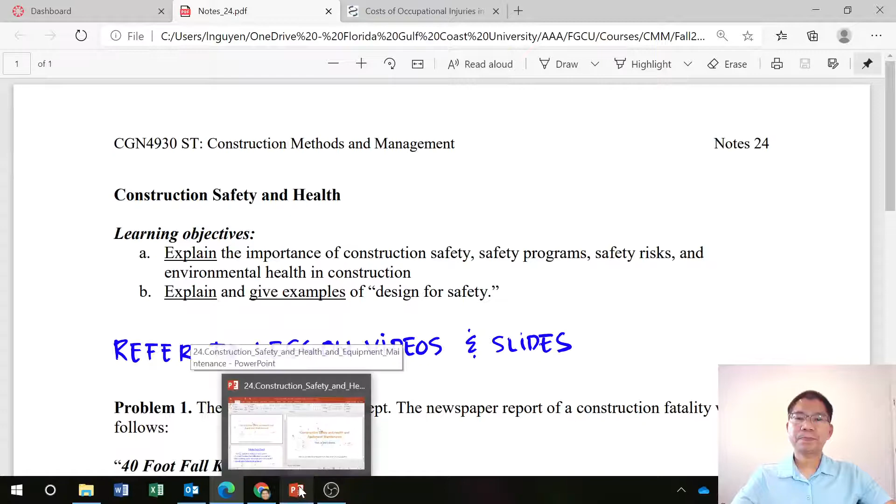And many of you will become engineers. Believe it or not, whatever you design may play a key role in the safety of the workers when they execute and perform the work to make sure that your design becomes a reality. So let's talk about some concepts of construction safety and health and equipment maintenance in this lesson.

So before we get into the design for safety, we want to go over some statistics about construction safety, to see how important construction safety is. Do you know what percentage of the U.S. workforce works in construction? Can you guess what percentage that is? Or what percentage of work fatalities construction accounts for? Whether construction is safer than other types of industry, like manufacturing, mining, etc.

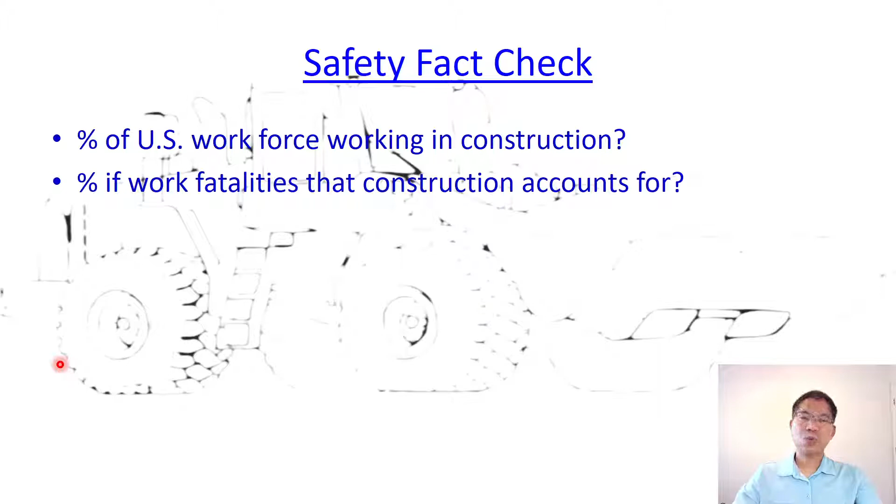And then, see if you can answer those questions, otherwise you can Google it. What percent of disabling injuries does construction account for? What are the annual costs of construction accidents? So with that, I want to show you all of that information in the report here.

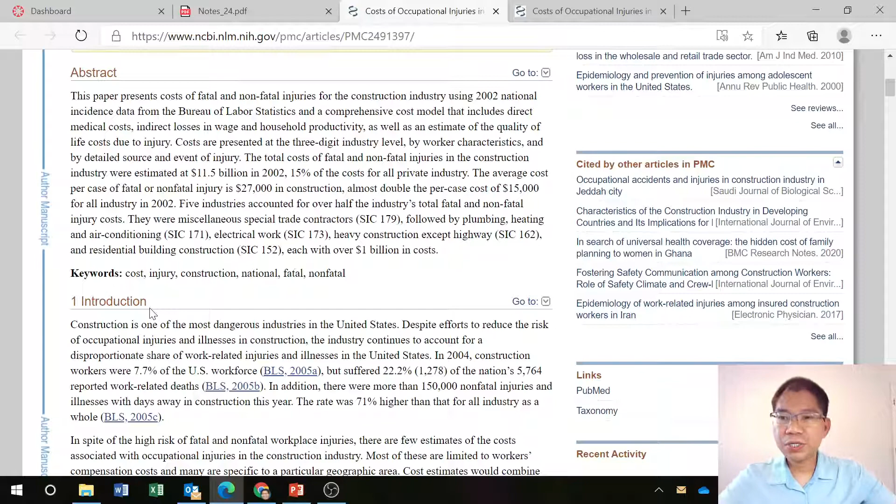So first, to answer those questions, you have occupational injuries in construction in the United States. So to answer the questions: the percent of the workforce working in construction, and the percent of worker fatalities that construction accounts for. Let's go back there. And you can see here in the introduction, the link is available in your slide.

Only 7.7% of the US workforce works in construction. But the suffering is disproportional, and you can see that 22.2% of the fatalities happen in construction. So the workforce is 7.7%, but fatalities account for 3 times that for the overall construction workforce. And the rate was 71% higher than all industry as a whole in terms of injuries. So that answered your question there.

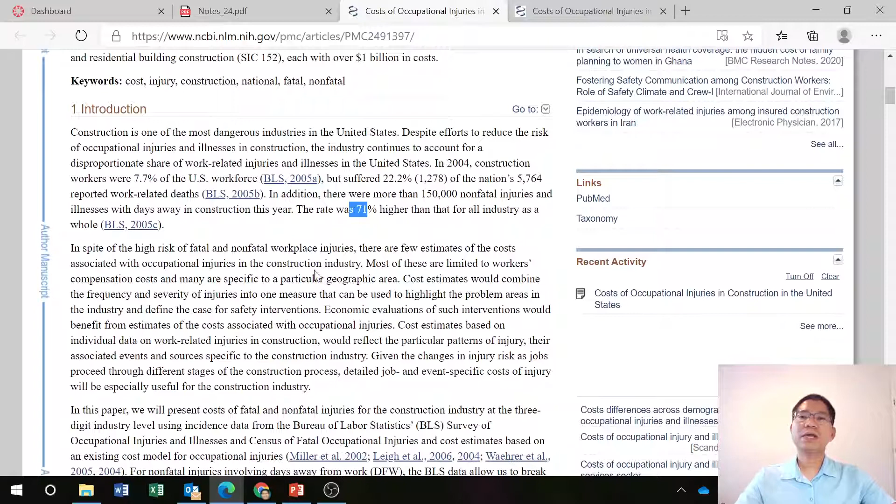And it also affects construction costs. If you read further in the link that you have here, you can determine it's very expensive, including direct costs and indirect costs involved when an accident happens. So go ahead and see the link that I have here so that you can know more about the statistics of safety and its importance. We have to emphasize always safety first in any workplace.

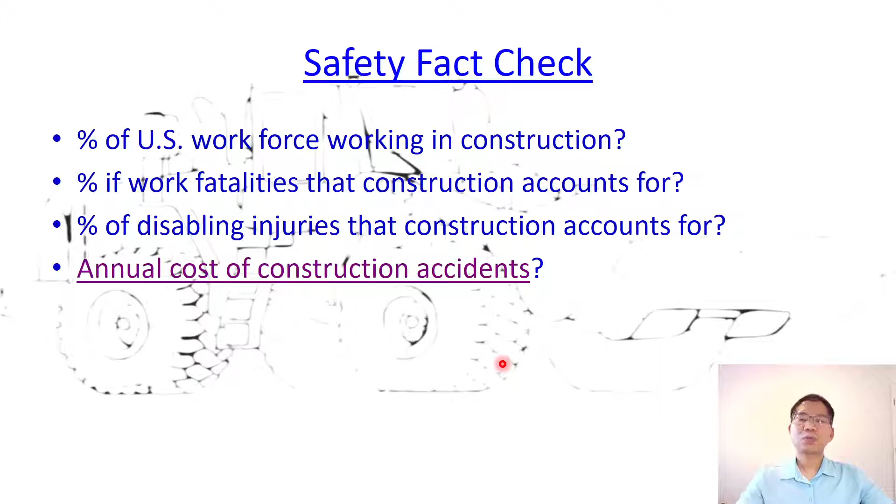And today I give you some scenarios, some examples where you can see your design may play a good, positive role in construction safety. So before we get into the design for safety, we want to see what the safety risks in construction are. So when you know that, when you design, you should be able to look at all of this.

The typical risks in construction include being struck by equipment, caught between two objects, things like that. Struck against objects, caught in or compressed, fall to a lower level, like a roofing worker falling, or the trench, the excavation, falling into the excavation pit, that is a fall to a lower level. Falls on the same level, if you get stuck, fall, things like that.

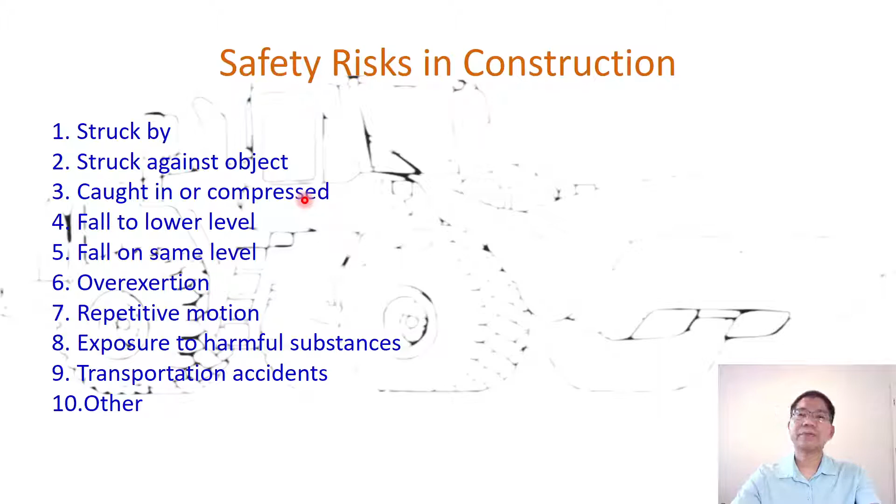Overexertion, repetitive motion that may cause fatigue, and that has a safety risk. Exposure to harmful substances, chemicals, things like that. Transportation accidents and others. So those are the risks involved. Electricity cuts, shocks, all of that. So with that, we recognize safety.

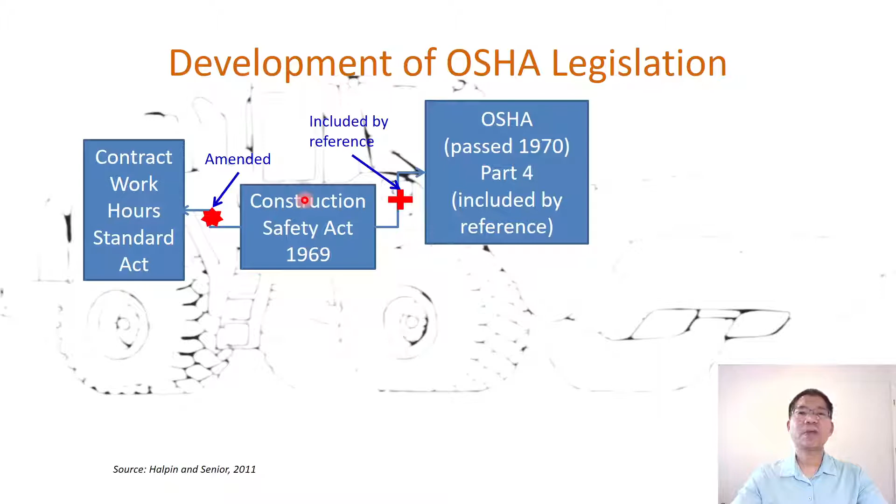So we have the OSHA legislation involved, OSHA meaning Occupational Safety and Health. You had a chance to learn about that when we did the excavation for foundations. It started as the Contract Work Hours Standards Act, and then it was amended to become the Construction Safety Act in 1969, and then included by reference in OSHA, Occupational Safety and Health, which was passed in 1970, Part 4, included by reference, and also published by the Secretary of Labor in the Federal Register in 1971.

We have Part 1926 construction standards. We had a chance to introduce that in the previous lesson. And then Part 1910 is the general standard. So most of construction safety is in the Federal Register Part 1926 construction standard, including what we learned in foundation construction, that is sloping, benching when you do the excavation, shoring, etc.

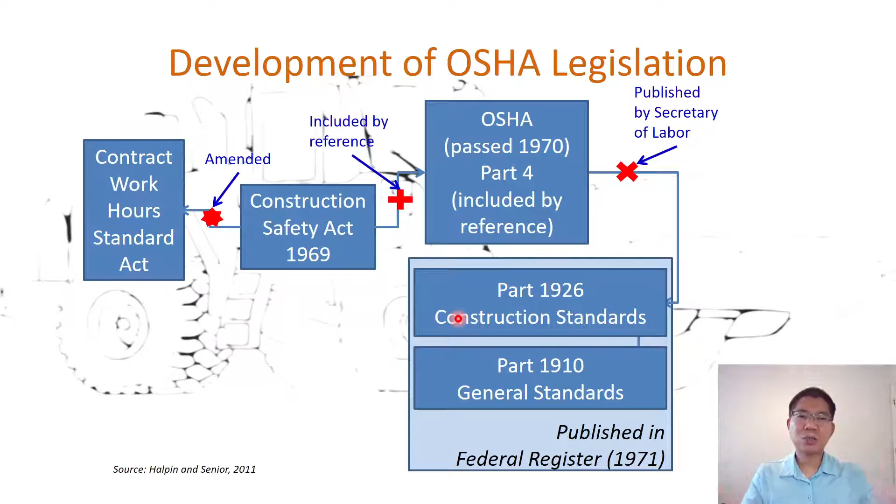So what happens if a company gets some violation of the OSHA regulation? And you can see the violation, it depends on what type of violations. Then there is an administrative proceeding or criminal. If it's willful or repeated, the same violation, $70,000 per violation. Routine or serious, $7,000 per violation.

Failing to correct a cited violation, it already violated but failed to correct, $7,000. Failing to post citations near the place where the violation exists, so that we know and try to avoid it, also $7,000 per violation. For criminal, you also see that in here, if it's killing, the maximum can be imprisonment, can be a life sentence, and a maximum fine.

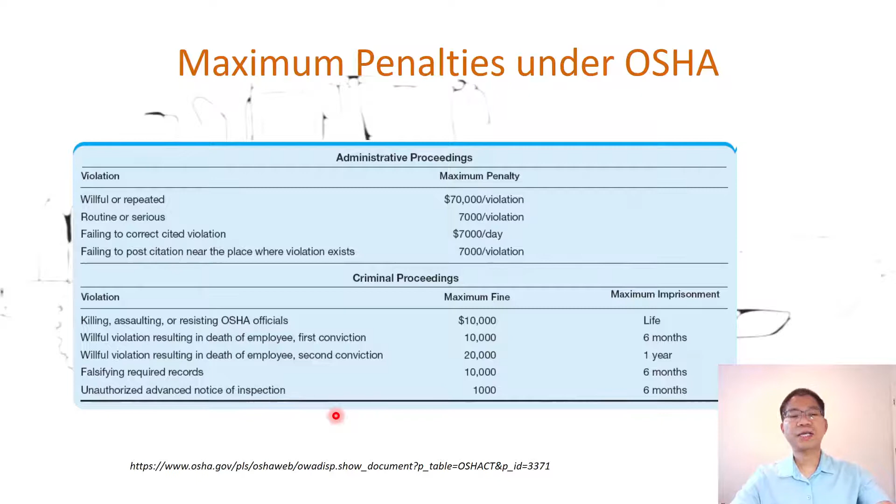So you see that it's serious when there is a violation or accident on the construction site. With that, multiple safety programs are implemented at the contractor organization: a formal safety program for all new employees, orientation on safety, periodic refresher training for each worker. Even at FGCU, every year faculty and staff have a safety refresher at the beginning of the academic year to review the safety protocols, things like that. In the workplace, in the laboratory, if you work for the laboratory, you have that as well.

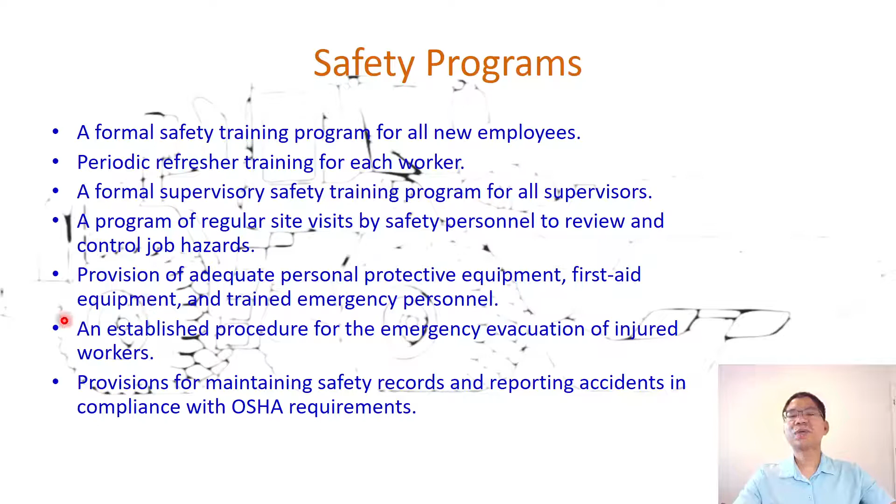A program that has regular site visits by safety personnel to review and control the job hazards. A formal supervisory safety training program for all supervisors. So all of these are the safety programs available that you can go ahead and explore. And then we have safety procedures for the program: general, equipment operation, who can operate, at what time, in what conditions.

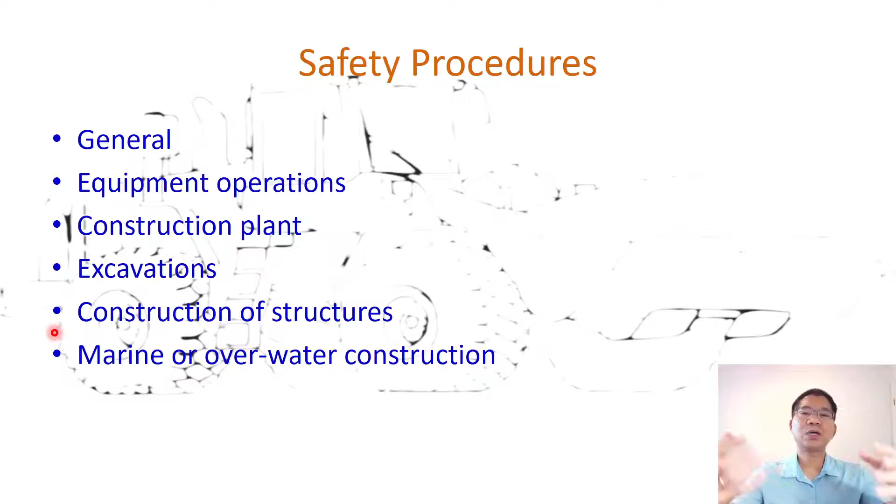So construction plant, excavation, something we already talked about in the very first lesson of the second part of our class. Construction of structures, marine, and overwater construction. So for all of that we need to have a specific procedure for your type of work.

I'll give you one actual example from the progress report of a project in terms of the safety update. You see this month they had 3 OSHA recordable incidents during this period, and you can see different subcontractors in this company have employees involved in some kind of incident, like a Titan employee fractured his left toe when his co-worker lost grip on the rebar they were moving, and it struck the worker on the left toe. So you see that it happens to anyone, and even for this power plant, in 1 month they have three OSHA recordable incidents.

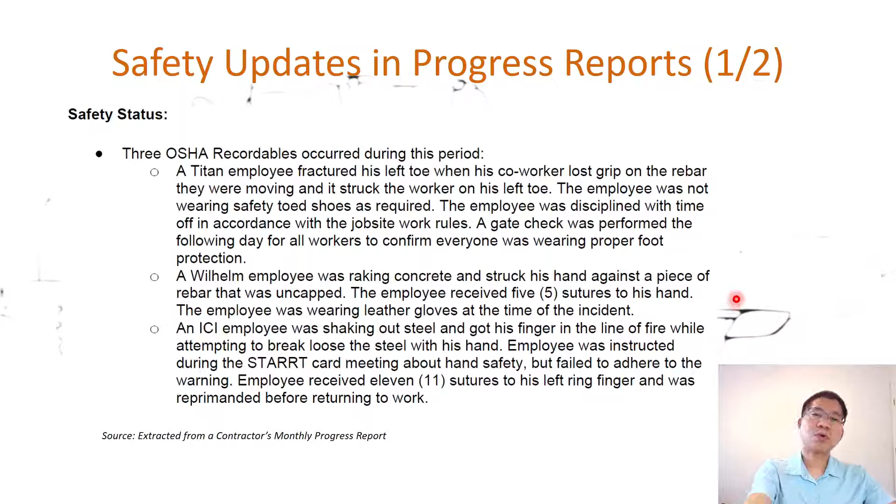And you also have the safety update in the progress report to see the lost time injuries, things like that in here. Also recordable injuries, year to date rate, inception to date from the beginning, 11. Inception to date means from the start of the project, because the project can take more than a year, so you have year to date, calendar days, and then inception, which means from the project beginning, which may be last year. Lost time accident, days since the last lost time accident. So if it increases, it's good, it means no lost time.

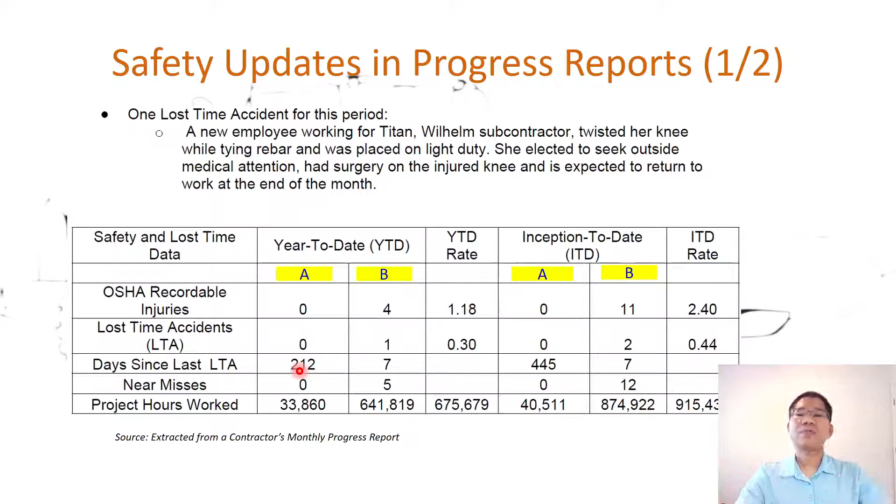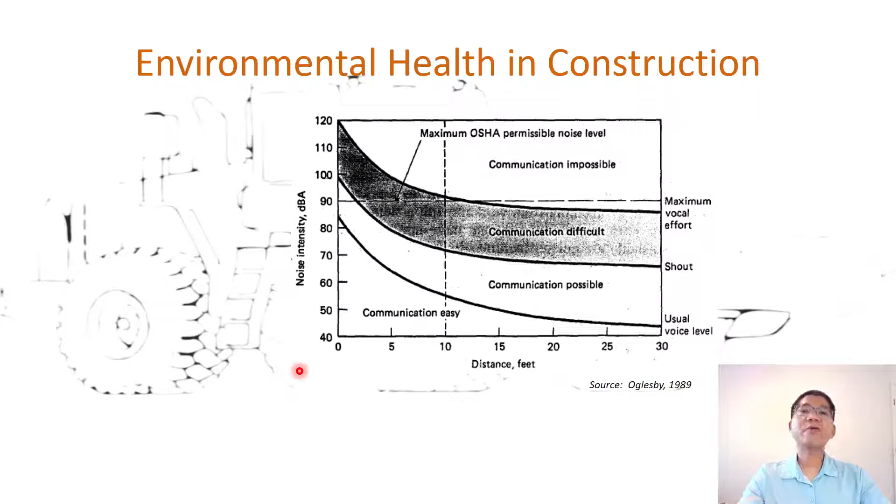And the second point, not only construction safety, the environmental health in construction is also important. As you can see, the noise, the dust, radiation, may not cause damage immediately, but it may affect the worker's health over time.

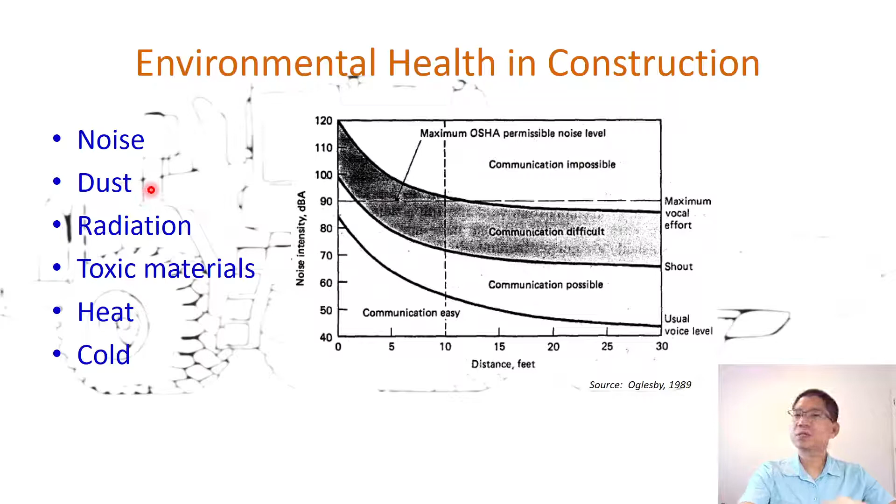Radiation, toxic materials, heat, cold, and in this case I show you one example in noise: the noise level in terms of decibels, and how far the worker is from the source of the noise. And you see the zones where communication is easy, communication is possible, it's difficult, and at some point when it's close to the noise, or the noise is too loud, communication is impossible, and over time it affects the worker's brain, things like that. Same for the dust, which affects the lungs, radiation, toxic material, heat and cold.

So by now you see the importance of construction safety. What do you as the engineer, when you design the work, play as a role in ensuring safety? So the concept of design for safety is involved in here.

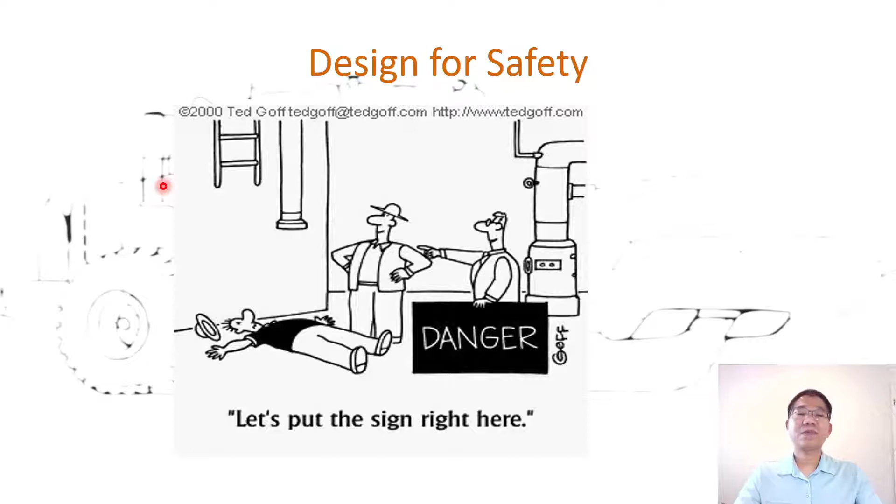So let's put the sign right here, so that after the fact, the danger, someone falls down, gets an accident - that's too late. That's reactive. You need to be proactive. Designers play a key role in making sure they are proactive and involved in safety at the construction site.

So example number one, and you can relate that in many items, so that when you design in the future, you can be able to improve the safety for construction workers.

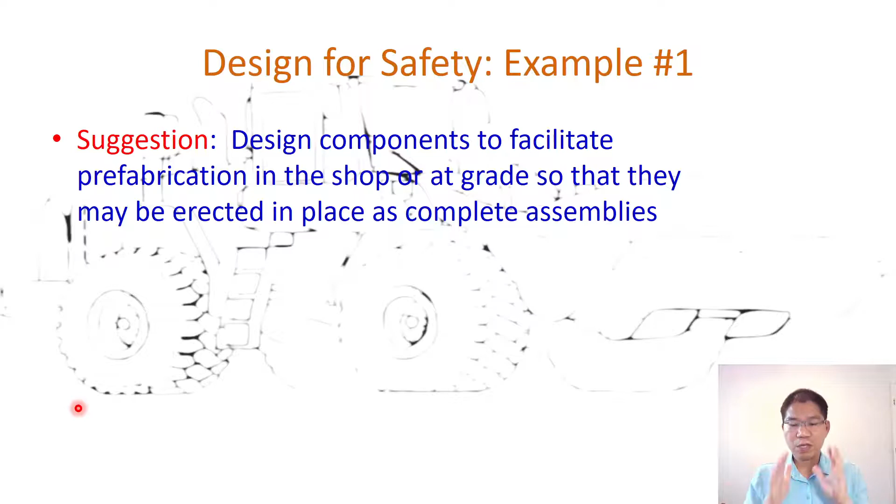Design components to facilitate prefabrication in the shop or at grade, so that they may be erected in place as complete assemblies. Because work in indoor areas, like a fabrication shop, is safer than working on site with too many uncontrolled variables. So if possible, when you design something, try to have it prefabricated rather than everything being done on site, so that you reduce worker exposure to falls or to being struck by falling objects on the construction site.

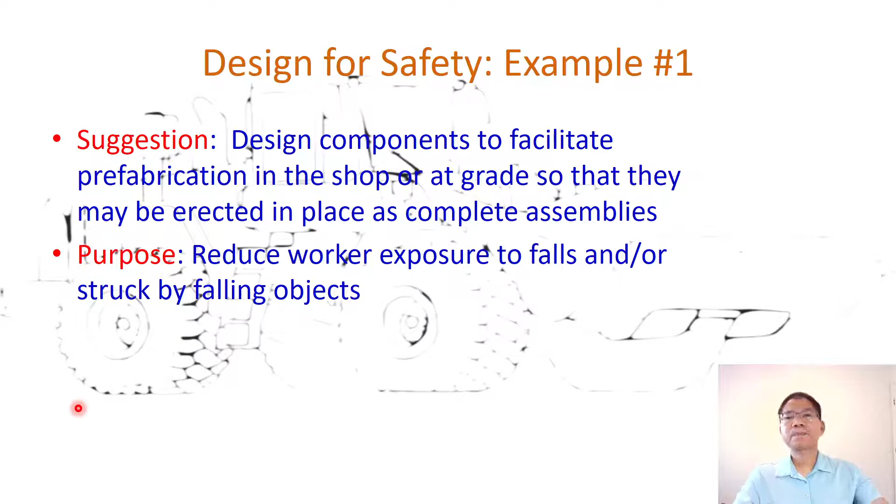The second example you may consider is designing steel columns - I'm sure you will encounter this at some point in your engineering career - with holes in the web at 0.53 and 1.07 meters. So that's about 1.5 feet and 3 feet above the floor level.

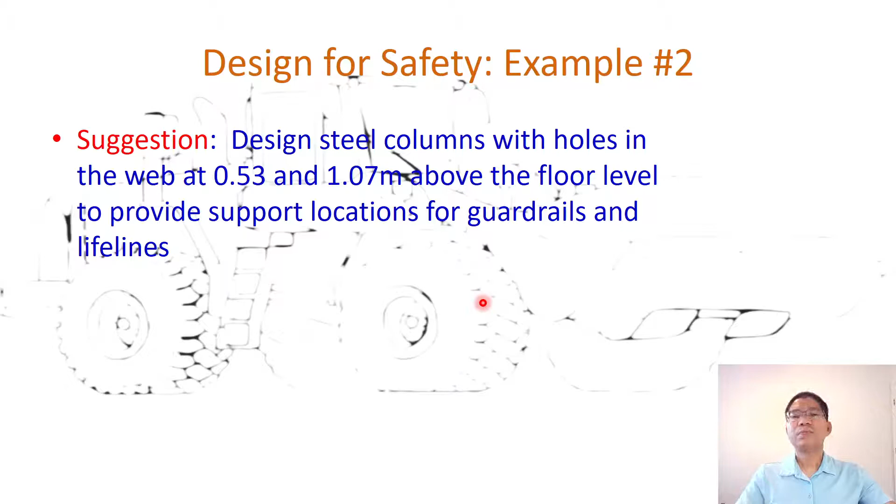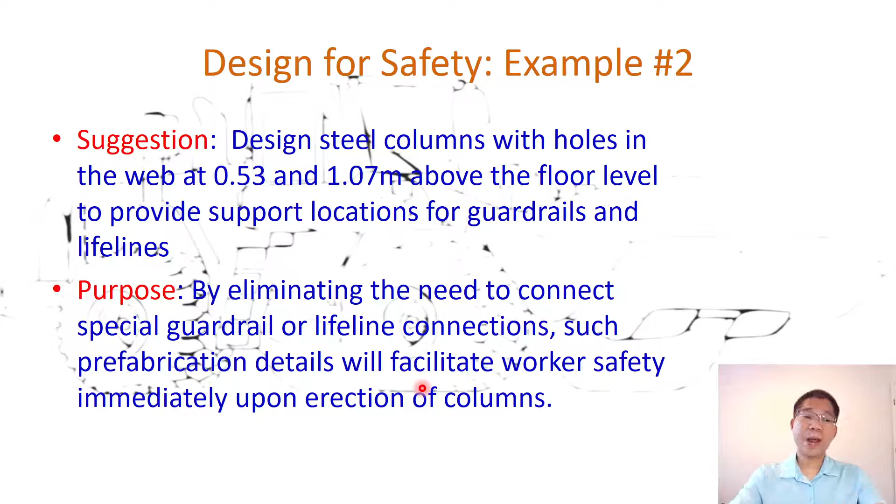This is to provide support locations for guardrails and lifelines, because you need to have a guardrail, safety net, etc. By putting the hole in place in advance during design, people later on can put the guardrail easily to protect the worker, eliminating the need for special guardrail or lifeline connections. This prefabrication detail facilitates worker safety immediately upon erection of the columns - they can put the guardrail using the hole that you already provided and specified in the drawings and specifications.

Example number 3 that you may consider: design underground utilities - water supplies, plumbing, foundation, etc. - to be placed using trenchless technologies. So instead of open cut, which has exposure risk because the excavation may collapse, use trenchless technology that we talked about in previous lessons.

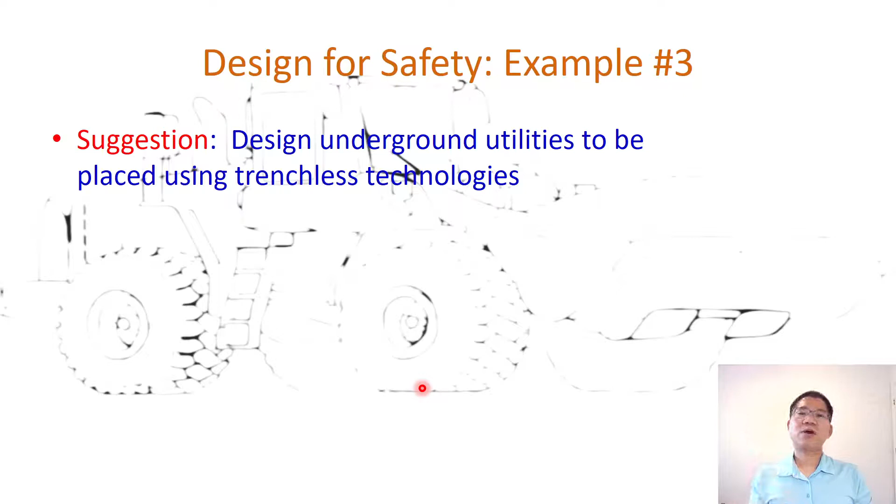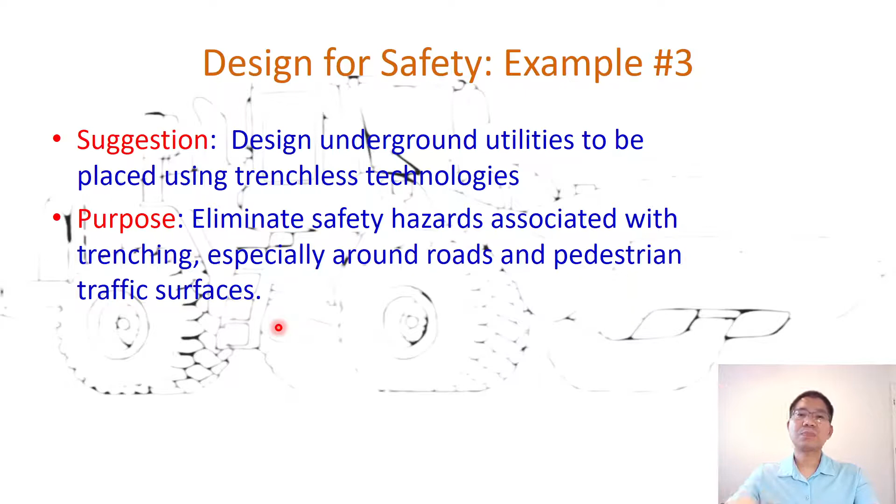With that, you eliminate the safety hazards associated with trenching, especially around road or pedestrian traffic surfaces. So now, even in our areas, many utilities are placed with trenchless technology. We don't need open cut excavation to install the pipe, water pipe, etc., going through the road or river.

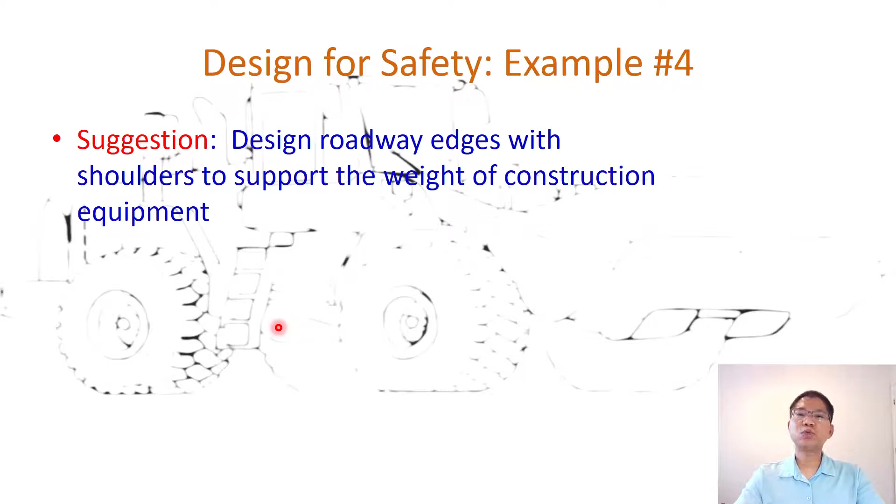Example number 4: design roadway edges with shoulders to support the weight of construction equipment. Otherwise equipment might fall off - this is to prevent heavy equipment from crushing the edge of the roadway and overturning.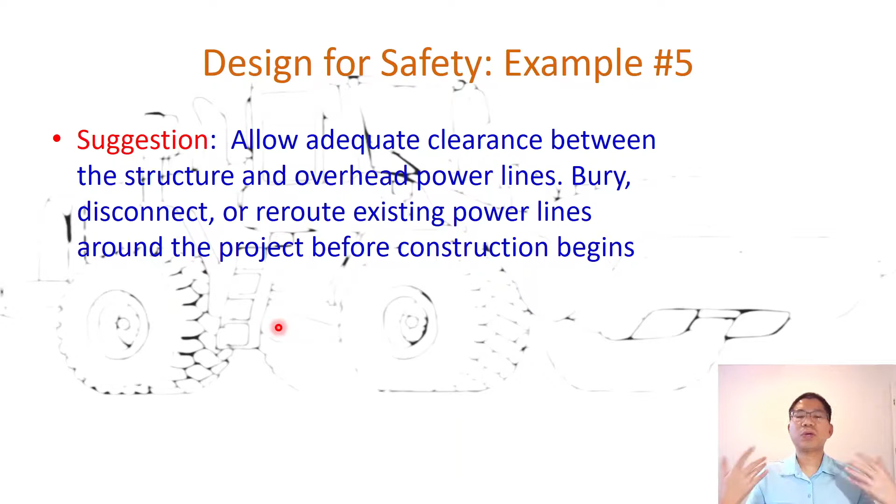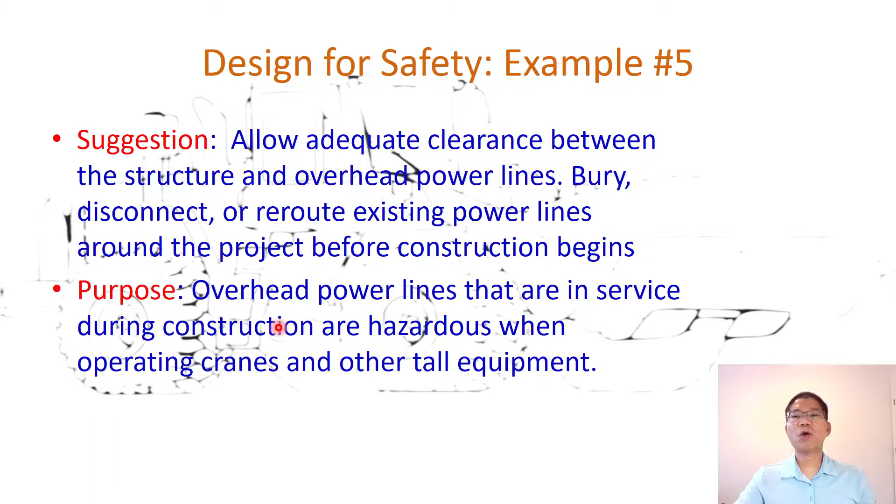So you can bury, disconnect, or reroute existing power lines around the project before construction begins, so that you can avoid accidents involving electricity. Overhead power lines that are in service during construction are very hazardous when operating cranes, as I mentioned, or other tall equipment are involved - it may touch that power line and an accident will happen.

So those are the design for safety considerations. When you design, you need to keep that in mind.

And in the book for today, they also talk about equipment maintenance. I won't go into detail, but equipment maintenance - servicing, adjusting, and repairing equipment - ensures good performance; maintenance plays a key role. We should have preventive maintenance and not wait until the equipment breaks down, because that downtime costs a lot of money. Preventive, routine maintenance should happen before anything occurs.

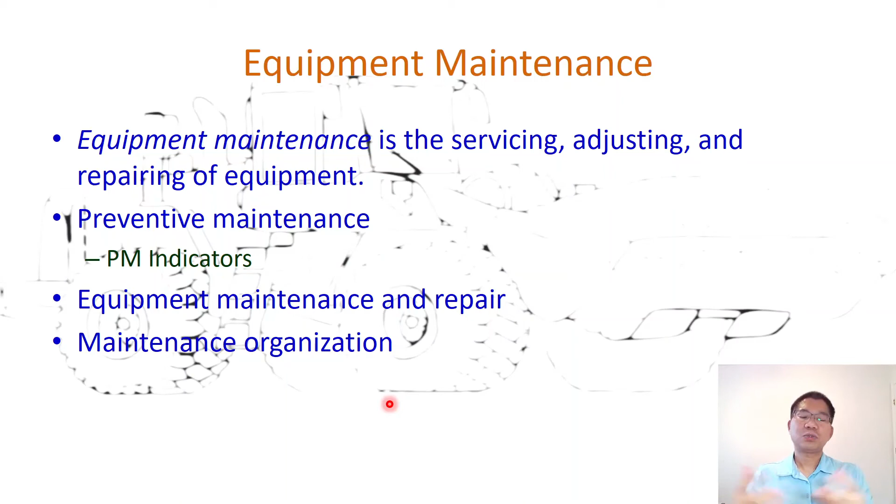In the book, they also give you preventive maintenance indicators, so you can see whether good preventive maintenance is taking place. Equipment maintenance, repair, and maintenance organization are all detailed in the book, but I don't want to go into detail in these slides. If you're interested in equipment maintenance, you can go further in the book to read about it.